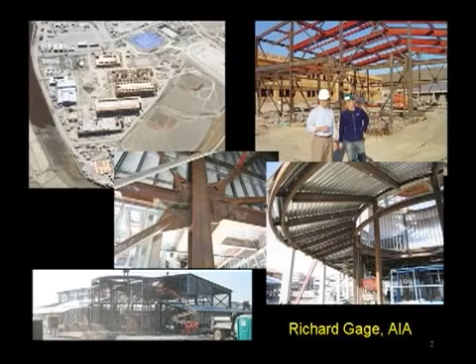Like many other architects, I've designed numerous fireproof steel frame buildings in my career, including $3 and $10 million gymnasiums, and the day-to-day construction administration services for this $120 million high school in San Ramon, California.

I'd like to start by thanking each and every one of you for being willing to consider the very difficult subject of the destruction of the World Trade Center and its staggering loss of life on 9/11. Just as architecture and engineering projects are sometimes joyful, sometimes quite difficult, this particular project has proven to be extremely difficult - not difficult in terms of reaching conclusions, but difficult in terms of the implications of those conclusions and finding people who are open-minded enough to be willing to hear the facts about these building collapses.

Check out every fact that we point out, because it's extremely important that we know the whole truth about this event. After all, it served as the pretext for the invasion of two countries in which already over 1 million people have perished, also as the pretext for the loss of many of our own cherished liberties here at home in the United States through recent legislation such as the Patriot Act, the Military Commissions Act, and the forthcoming Senate Bill 1959, the Violent Radicalization and Homegrown Terrorism Act, in which many of us can be named a terrorist and have no right to an attorney or a trial by jury.

Another 9/11 could happen again if we don't dedicate ourselves to finding out exactly what happened and why, and to bringing those actually responsible to justice.

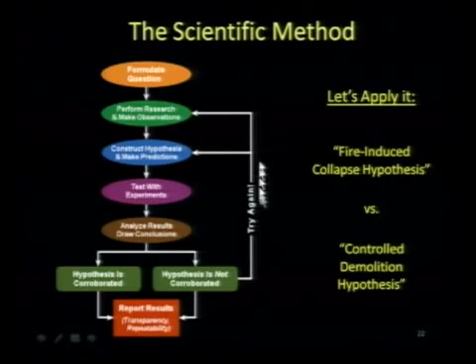If it is not found to be corroborated, we think and try again, and construct a new hypothesis with new observations, new research. Buildings are destroyed by a number of different forces, each of which have very different and identifiable characteristics. For instance, fires affect buildings quite differently than controlled demolitions.

Fires, by their nature, tend to creep from place to place, as they run out of fuel, moving to fresh new fuel sources, leaving the burned out area to cool. So when collapses do occur - and by the way, you'll note that they've never occurred in over 100 examples of very hot, very large, and very long-lasting fires -

buildings tend to fall over. They fall asymmetrically, burned out on one side organically, if you will. It's a natural process. They don't fall straight down through the path of greatest resistance.

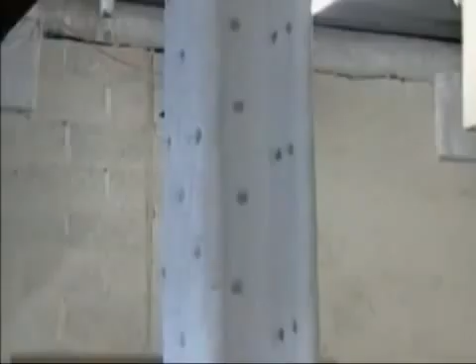Let's listen to Jonathan Barnett from FEMA talk about what fires are expected to do in steel buildings. The way in which steel-framed buildings behave in fires depends on their construction. In this test, done by British Steel in 1995, a large amount of typical office furniture was burned to see what would happen to the heavy steel beams that supported the ceiling.

When steel is bare, when it heats up, it gets weaker. It's not that it melts in a fire. In fact, normal fires are not hot enough to melt steel. Even if you were, for example, to use an unusual fuel like kerosene, you cannot achieve temperatures hot enough to melt steel. But what happens is it starts to lose its strength.

And as it loses its strength, it starts to sag. It becomes softer and sags and can no longer support the load. This was the largest test of its kind ever conducted. It showed how unprotected steel can be distorted, even by a normal office fire. But as is typical in steel buildings, the structural beams only slowly and progressively warped and sagged. There was no chance of a sudden collapse.

In over 20 years, I have not seen, until recently, a protected steel structure that has collapsed in a fire. So what was the cause of the devastating, explosive failure that happened to the World Trade Center?

These particular buildings collapsed. They follow the path of least resistance, or they fell over. You can see that the building structure holds the building together in some recognizable form. The structural elements have not been dismembered from each other, and their concrete is not pulverized to dust. They follow the path of least resistance, which is generally over.

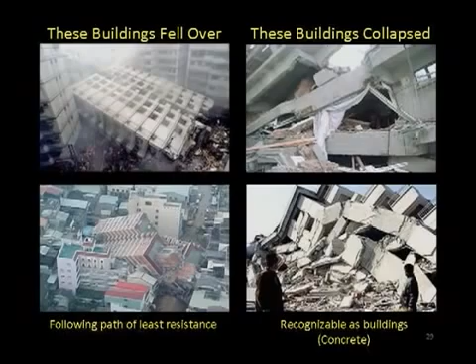These buildings exploded. Witnesses hear sounds of explosions. They see flashes of light. There's thick, billowing, enormous pyroclastic clouds of pulverized concrete. The expansion of the gases very quickly produces this cauliflower-like formation that we see in the smoke. This is a controlled demolition.

Let's focus on this type of destruction first. We have hundreds of examples from all across the country from which to make our comparison, because it's the most commonly used method to demolish high-rises. This is what a high-rise looks like when it's being demolished with explosives.

Controlled demolitions can be engineered in many different ways. Normally, the purpose of a controlled demolition is to remove a structure while avoiding damage to adjacent structures, and to do so economically. Typically, a tall building like this is demolished by placing thousands of cutter charges throughout the columns and beams in the building, then detonating them in a very precise order, starting with the interior structures and progressing outward, synchronistically timed floor by floor.

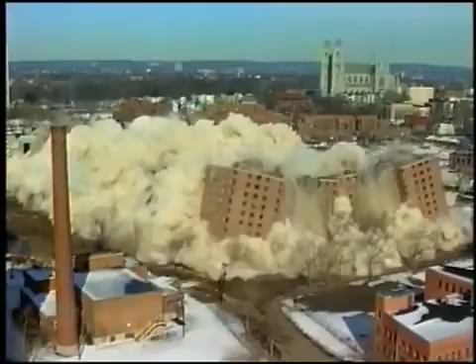Destroying the interior columns allows the unsupported weight to pull the exterior inward. Destroying the building from the ground up allows the weight of the building to be harnessed to do much of the destruction. So the result is an implosion, producing a vertical, symmetrical collapse at free fall speed into a consolidated rubble pile that's broken up and ready for loading and shipment. Now, this is a feat that only a handful of companies in the United States can accomplish.

Let's take a look at some of the key characteristics of controlled demolition. First, we have a sudden onset of destruction at the base of the structure. We have straight down symmetrical collapse into its own footprint, because demolition waves remove the column support, resulting in a free fall speed, virtually, through the path of what was the greatest resistance, thousands of tons of structural steel. We have a total dismemberment of the steel structure, so it's loaded and ready for shipment.

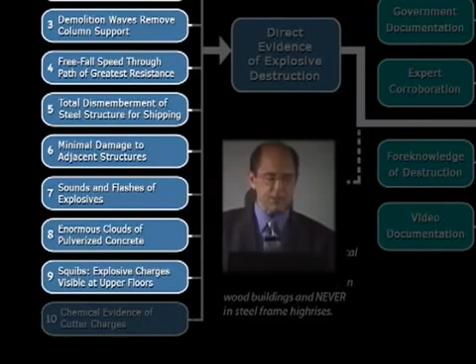We have minimal damage to adjacent structures, sounds and flashes of explosions heard and seen by witnesses, enormous clouds of pulverized concrete, squibs sometimes, explosive charges that go off at the wrong times, chemical evidence of cutter charges. These are all fairly typical, and they go to show us direct evidence of explosive destruction.

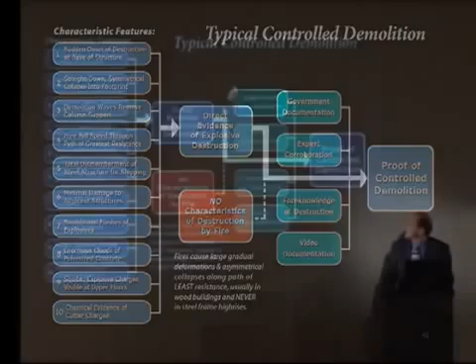Now, the interesting thing is that not one of these typical characteristics of controlled demolition can be explained or accounted for by fire, let alone all 10 of them. Typically, we'll have government documentation, expert corroboration, foreknowledge, and video documentation, all of which supports the hypothesis of controlled demolition, providing proof beyond a reasonable doubt.

Let's take a look at World Trade Center 7 now. It was 47 stories tall, what would have been the tallest building in 33 of our states, half the height of the Twin Towers, dwarfed only by its proximity to what was, for a couple of years, the tallest buildings in the world. It was not hit by an airplane.

It was the third World Trade Center high-rise to collapse on 9/11, at about 5:20 in the afternoon. World Trade Center 7 was hit by debris from the North Tower. You can see it being pelted here. And it sustained about 8 fires, according to NIST, on various floors.

This is World Trade Center 7, 47 stories high. Don't be confused by the shadow from this building. Here we have the 12th and 13th floor fires and the 7th floor fire on the north side of the building, the opposite side of the building that was being pelted by the North Tower.

Curiously enough, the Securities and Exchange Commission was operating out of this floor, which lost thousands of files related to hundreds of cases it was actively pursuing against Wall Street companies like Enron and WorldCom. So we are looking for an investigation that goes well beyond the buildings, of course.

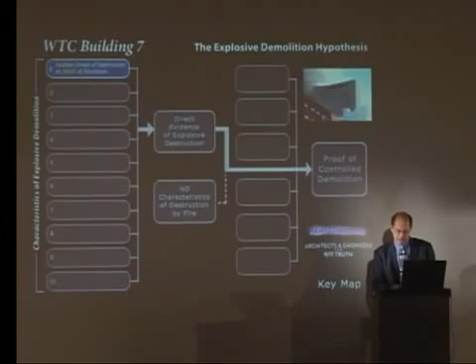Now let's take a look at the evidence of World Trade Center 7 and see how it stacks up against the typical features of a controlled demolition, starting with, is there a sudden onset of destruction? Let's listen to this emergency worker.

We were watching the building actually because it was on fire. The bottom floors of the building were on fire, and we heard this sound that sounded like a clap of thunder. Turned around, we were shocked to see that the building was, it looked like there was a shock wave ripping through the building, and the windows all busted out, and it was horrifying.

And then, about a second later, the bottom floor caves out, and the building followed after that, and we saw the building crash down all the way to the ground. A sound of a clap of thunder, a shock wave ripping through the building, and windows busting out, and then the building coming down. Do we have a straight-down symmetrical collapse into the building's footprint?

Let's listen to Dan Rather narrate this collapse for us as we take our first look at the collapse of Building 7. What you're seeing are high shots. Now, here we're going to show you a videotape of the collapse itself. Now we go to videotape of the collapse of this building.

It's amazing. Amazing, incredible, pick your word. For the third time today, it's reminiscent of those pictures we've all seen too much on television before, when a building was deliberately destroyed by well-placed dynamite to knock it down. What, Dan? Deliberately destroyed by well-placed dynamite to knock it down?

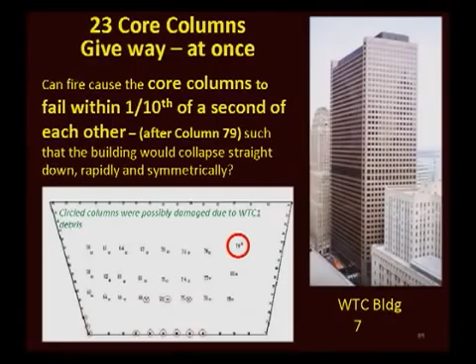Well, here's a floor plan of Building 7. Now, to bring a building smoothly, symmetrically into its own footprint without falling over, what we have to do is remove the core columns, because what we want to do is bring the outside of the building in on itself. Now, this involves a high degree of precision that fire is not capable of, being an organic process.

We're told by NIST that there is virtually no influence in the collapse from the debris from the North Tower or the damage caused by it, or from the diesel that may have been spilling out of the diesel line. Why? Well, the east penthouse is the first part of the building to collapse, a few seconds before the global collapse. NIST is now targeting column number 79. That is where they say the collapse initiated.

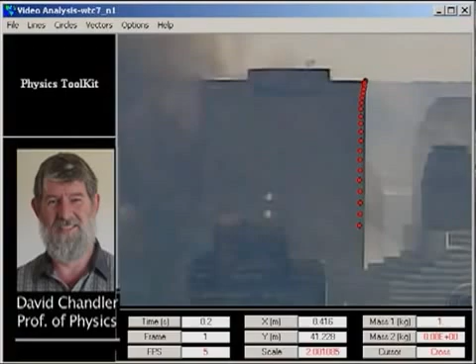Do we have a free fall speed of collapse through the path of greatest resistance? Let's listen to David Chandler. We can measure the acceleration of Building 7 by video analysis. I used a magnifying glass to place markers at the corner of the building on each frame. From this, the software constructs a data table and various graphs. The slope of the velocity graph gives the acceleration.

Note that global collapse starts suddenly, and for the next 2.5 seconds the building accelerates at the rate of 9.88 meters per second squared. The acceleration of gravity in New York City is 9.802 meters per second squared. The difference is not significant. In other words, the rate of collapse of World Trade Center Building 7 over the first 2.5 seconds is literally indistinguishable from free fall in a vacuum.

What are we talking about? You can see second by second the building gaining downward momentum. You can plot the drop distance on a graph of time and it fits the free fall curve almost perfectly. What does this mean? That the columns had to have been removed, and removed virtually simultaneously on each floor, synchronistically timed, so the building had no resistance virtually on the way down.

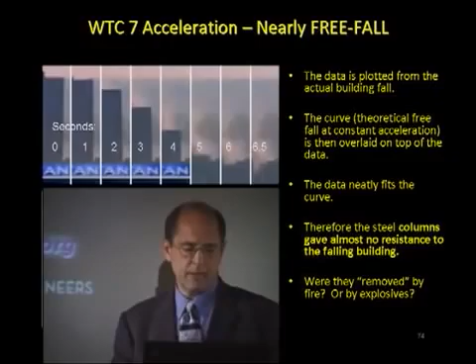Do we have a total dismemberment of the steel structure? We had a 47-story skyscraper compressed to 4 stories. How does this happen? This building had some moment-resisting frames on several floors, that's where the beams are welded very rigidly to the columns.

Do we have sounds of explosions, though? Here's Craig Bartmer from the New York Police Department. The whole time you hear him: thum, thum, thum, thum, thum. I think I know an explosion when I hear it. I was real close to Building 7 when it fell down, but that didn't sound like just a building falling down to me while I was running away from it.

There's a lot of eyewitness testimony down there hearing explosions. I didn't see any reason for that building to fall down the way it did, and a lot of guys should be saying the same thing. How about Kevin McPadden? He came back over with his hand over the radio, and it sounded like a countdown. At the last few seconds, he took his hand off, and you heard 3, 2, 1, and he was just saying, 'Just run for your life, just run for your life.' And then it was like another 2, 3 seconds, you heard explosions, like boom. It's like a distinct sound.

It's not like when in compression, boom, boom, boom, boom, like floors that were dropping and collapsing. This was boom, and you felt a rumble in the ground, like you wanted to grab onto something. That, to me, I knew that was an explosion. There was no doubt in my mind.

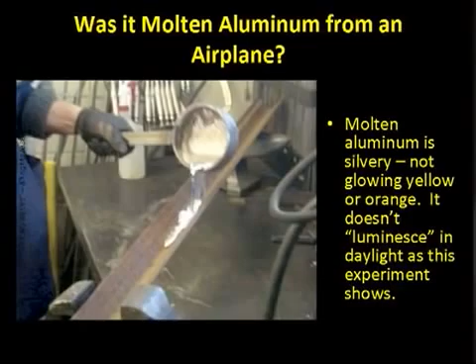As of 21 days after the attack, the fires were still burning and molten steel was still running, says World Trade Center structural engineer Leslie Robertson to a conference of structural engineers on October 5th, 2001, one month after 9/11. Debris past the columns was red hot, molten, running. Fires burned, molten metal flowed in the pile of ruins, still settling beneath my feet.

Well, what do the first responders and the demolition contractors say about molten metal? Saw pools of literally molten steel. Molten metal beams had just been totally melted. It was dripping from the molten steel. Steel flowed in molten streams. They're finding molten steel, seeing the molten steel, uncovering red-hot metal beams. Molten metal, red-hot, weeks after the event. Molten steel at the heart of the tower's remains. Molten steel beams, streams of molten metal that leaked from the hot cores and flowed down the broken walls. Molten metal dripping from a beam. The end of the beam would be dripping with molten steel.

Structural engineer Abolhassan Astaneh-Asl from Berkeley cites and documents, 'I saw melting of girders in the World Trade Center, still so hot that molten metal dripped down the side of the wall from Building 6.' A fire truck 10 feet below the ground was still burning two weeks after the tower collapsed. Its metal so hot that it looked like a vat of molten steel. Pieces of steel, still cherry red.

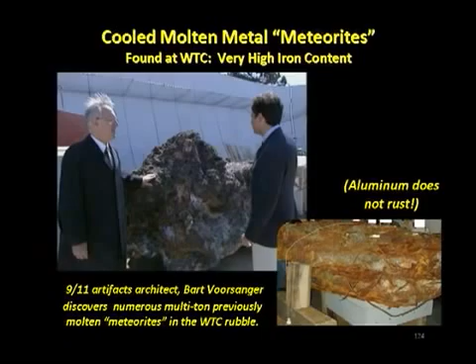One of the more unusual artifacts to emerge from the rubble is this rock-like object that has come to be known as the meteorite. It's this fused element of steel, molten steel and concrete, all fused by the heat. Architects, engineers, people who work with steel, welders have just never seen the level of destruction and deformation of this material in our lives. These cooled meteorites are not aluminum because aluminum doesn't rust. So it's not a melted airplane.

Mark Loizeaux, the president of Controlled Demolition Incorporated, told the American Free Press that in the basements of the World Trade Center, where 47 central support columns connected to the bedrock, hot spots of literally molten steel were discovered more than a month after September 11th. These incredibly hot areas were found at the bottoms of the elevator shafts, down seven basement levels. The molten steel was found three, four, and five weeks later when the rubble was being removed. He said that molten steel was also found at World Trade Center 7. The highest temperature was in the east corner of the South Tower, where a temperature of 1,377 degrees Fahrenheit was recorded. The molten steel in the basement was more than double that temperature.

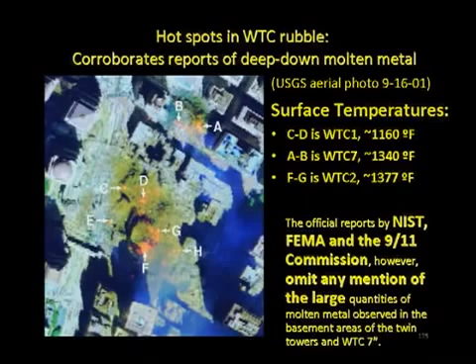What are we talking about here? Here is Building 7 at A and B, and here is the North Tower and the South Tower. These hot spots are 1,340 to 1,370 degrees—the temperatures of the hottest office fires. But there was no fire on the surface of Ground Zero after the collapses. What are we measuring here? We're measuring the molten metal that was seen by these first responders four, five, six stories down below in the basements, surely at least two or three times these temperatures.

What's the problem with that? Office fires, Eagar says, reach 1,200 degrees. NIST claims 1,800 degrees, for which we have no evidence for office fires of that temperature in the Trade Center towers. Structural steel doesn't even begin to melt until 2,700 or so degrees. We're missing 1,000 to 2,000 degrees of temperature, heat energy required to produce this stuff. Where is it coming from? We'll be taking a look at a possible suspect, thermite, which reaches temperatures of 4,500 degrees. Molten metal flowing off the substance held in the jaws of this backhoe.

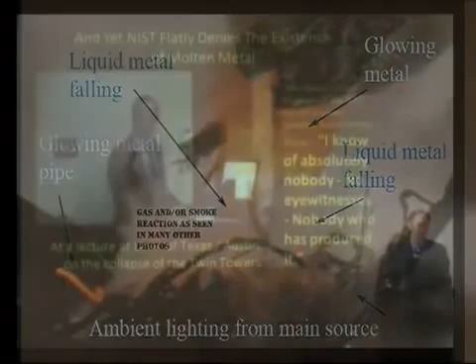Let's listen to John Gross, lead engineer of NIST, tell us about the molten metal from his perspective.

I'm curious about the pool of molten steel found in the bottom of the towers. Have you seen it? Not personally, but eyewitnesses there found huge pools of molten steel beneath the towers, and some scientists don't think the collapse of the building could have melted all that steel. A physics professor, Stephen Jones, analyzed some of the steel and found evidence of thermate residue, which would explain how the buildings collapsed by means of pre-planted explosives. So have you analyzed the steel for any of those residues?

First of all, let's go back to your basic premise that there was a pool of molten steel. I know of absolutely nobody, and no eyewitness who said so, nobody who's produced it.

You'd get down below and you'd see molten steel running down the channel rails, like you're in a foundry. Yeah, like lava, like it was lava from a volcano. No eyewitness who said so.

There are actually melted beams where molten steel was being dug out. No eyewitness who said so.

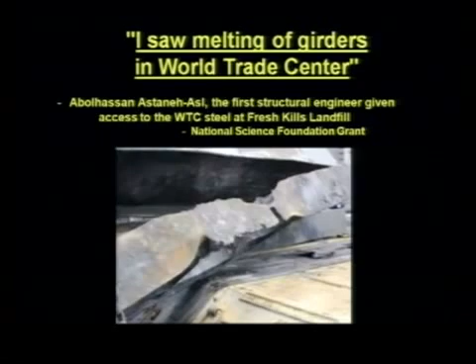And this structural engineer documents, I saw melting of girders in the World Trade Center. Nobody who's produced it. This fused element of steel, molten steel. I know of absolutely nobody, and no eyewitness who said so, nobody who's produced it.

What is the problem here? Somebody's lying. I'm going to leave it up to you to make your own conclusions. The last fire was not even extinguished for 3 months after 9/11. Tom Manley says you couldn't even begin to imagine how much water was pumped in there, it was like creating a giant lake.

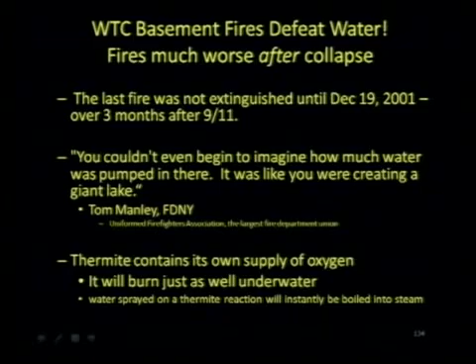Well, thermite contains its own source of oxygen. It burns just as well underwater. How about chemical evidence, though? What produced all this molten metal? And what is thermite anyway?

Thermite, an incendiary used by the military, is a compound of iron oxide and aluminum, which when ignited sustains an extreme heat reaction, creating molten iron. In just 2 seconds, thermite can reach temperatures over 4,500 degrees Fahrenheit, quite enough to liquefy steel. We know open-air fires cannot burn hot enough to melt steel, but metal had melted at the base of the towers.

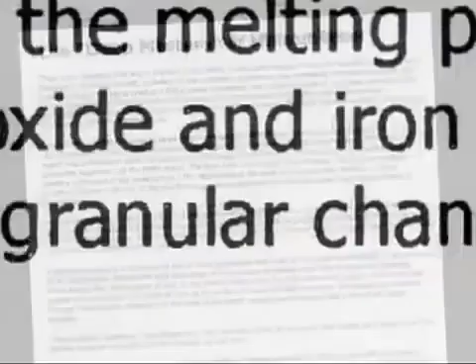Appendix C of the FEMA report describes sulfur residues on the World Trade Center steel. The New York Times called this the deepest mystery of all. Sulfur slightly lowers the melting point of iron, and iron oxide and iron sulfide had formed on the surface of the structural steel. Sulfur used with thermite is called thermate, producing even faster results.

NFPA 921 is the guide for fire and explosion investigations. Was it used? They say unusual residues could arise from thermite, magnesium, or other pyrotechnic materials. In a crime scene, which this was an example of, did NIST use the guide? No. They acknowledged they didn't even look for such evidence.

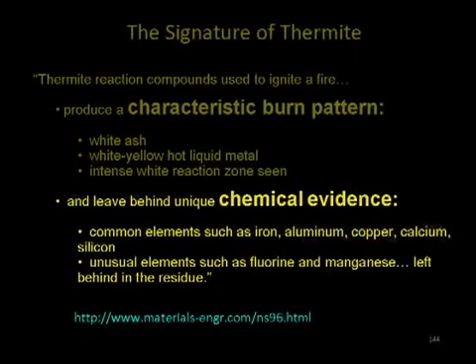But others did. Dr. Stephen Jones performed chemical analysis on the previously molten metal. He did background research, again part of the scientific method. Thermite would create a characteristic burn pattern with a white ash, a white-yellow hot liquid metal, and intense white reaction zones. It would also leave behind chemical evidence: common elements such as iron, aluminum, copper, calcium, silicon, and unusual elements such as fluorine and manganese left behind in the residue.

He sent a sample from this 40-pound chunk of previously molten metal, one of those meteorites. He finds it's predominantly iron, so we can rule out aluminum from the jet plane. It has small amounts of aluminum, sulfur, and potassium, and manganese and fluorine in abundance. Manganese is from potassium permanganate, commonly used as an oxidizer in thermite. Fluorine is also used in sol-gel type thermite charges. So these appear to be the thermite fingerprint.

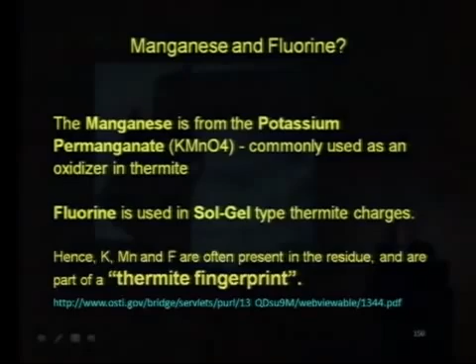Let's take a look at what else Dr. Jones found in the slag from the end of this memorial at Clarkson University. He performs X-ray fluorescence on this small piece of slag and finds, once again, iron, sulfur, potassium, manganese, calcium. Sol-gel explosives are a super thermite, tiny aluminum particles in iron oxide in this sol-gel.

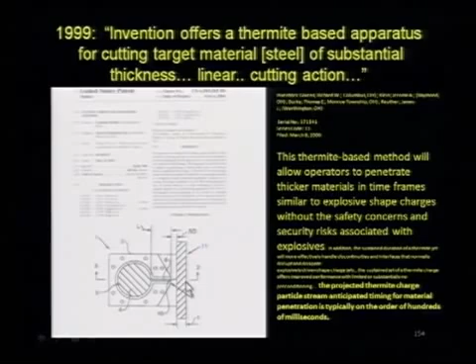They can be cast into shape, like a clay. Lawrence Livermore Lab did research on this, and this invention offers a thermite-based apparatus for cutting target materials. You pack the thermite in here, ignite it, and it's forced through, melting the structural steel element in fractions of a second, almost as effective as high-energy explosives like RDX and C4.

Which are more common in classic controlled demolitions. If sol gels were used, they would leave behind a very unique signature: 1,3-diphenyl propane. In fact, the EPA finds one molecule in their toxicological studies at levels that dwarfed all others, 1,3-diphenyl propane. Erik Swartz says they've never observed it in any other sampling they've ever done.

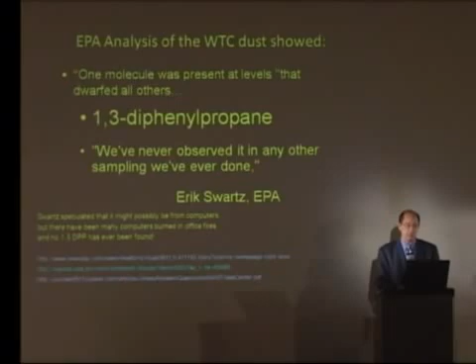But is there evidence of thermite in the World Trade Center dust? Dr. Jones received no less than four separate samples of World Trade Center dust, some of it from Janette MacKinlay's apartment across the street, where the windows blew in and filled her apartment with dust. Another sample was found about 10 minutes later on the Brooklyn Bridge.

He takes this and puts a magnet over it, and finds small particles that come up to the magnet. Some of them are angular, some are round. They look like this. In fact, he calculates by the weight of the amount of these spheres found in the dust that there must have been about 10 tons across all the available dust. They're about a 1/16 of an inch in diameter at the largest, and most are smaller than a human hair. What could produce such an incredible array of microspheres?

If you had thousands of cutter charges going off in the columns and beams throughout the building, under this incredible pressure, you'd see something like this—tens of thousands or millions of tiny droplets. What's the shape of those droplets? When a liquid is dispersed like this, its surface tension forms it into almost a perfect sphere. In the case of molten iron, those droplets cool and fall along with the dust everywhere.

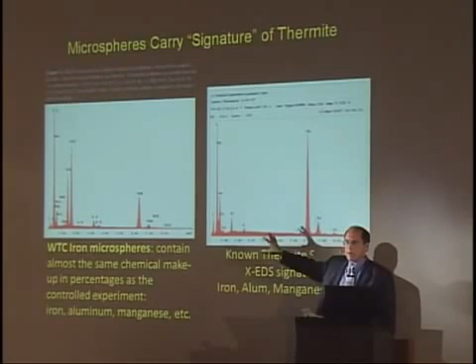He compares the spheres to a known thermite experiment performed by John Peroulis in Nevada, which finds the same spheres. In fact, another XEDS is done, and we find in the microspheres the same kinds of evidence—iron, manganese—and in the case of this known thermite signature, it matches basically. In other words, we have a controlled experiment to compare the results against. For those who know how to read these graphs, such as Dr. Jones and others, this is pretty much a direct match indicating this is the signature of thermite.

Dr. Jones is not the only one who finds these iron-rich microspheres. The EPA finds them in all the dust in the toxicological studies they're doing. They have no idea where they came from. They sweep it under the rug. It has only one possible formation: from liquid molten iron under extreme pressure. R.J. Lee finds the iron-rich microspheres on top of the Deutsche Bank building in their toxicological studies.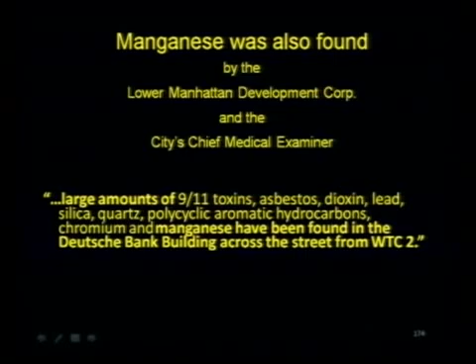Dr. Jones concludes that given the mix of trace metals present in high concentrations in the dust, such as zinc, copper, manganese, and the formation of iron-rich aluminum spheres, it's clear that significant aluminothermic reactions occurred. He can reverse engineer this and suggest there must have been in the thermite mix powders of aluminum, iron oxide, copper oxide, zinc nitrate, and potassium permanganate.

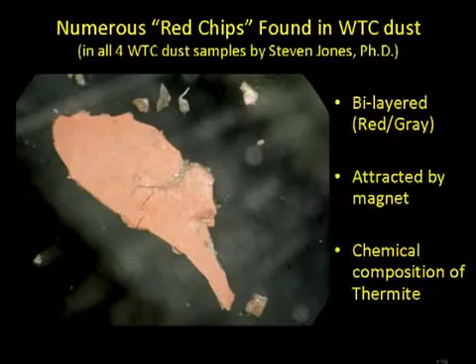Would there possibly be any unignited thermite pieces in the World Trade Center dust? Indeed, he finds it—it also comes up to the magnet from his dust samples. Many chips, one about a 1/16 of an inch long, red on one side, gray on the other. The red side is composed of tiny iron oxide particles and aluminum. He does an XEDS on this too, finding a little sulfur, more aluminum, lots of iron, and manganese.

Compared to traditional thermite, it's also a match for unignited thermite. This stuff is not made in a cave in Afghanistan—the Lawrence Livermore lab came out with papers about this. The particles being so small allow for almost instantaneous ignition between the two chemicals, aluminum and iron oxide, producing very explosive results. Los Alamos lab and Lawrence Livermore lab have produced these results.

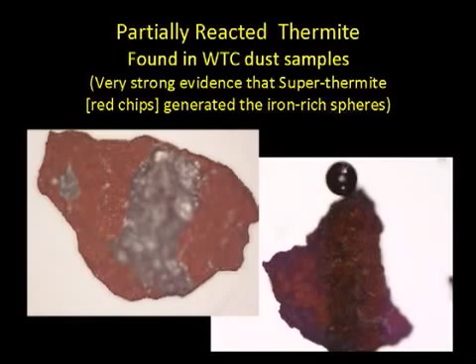He continues his study and finds additional chips that are partially ignited, with spheres embedded in them, indicating that the source of the spheres is, for all intents and purposes, identified very clearly. With Dr. Jones and his small team of scientists, through EDS, XRF, and WDS, they identify the components of these spheres and chips: predominantly iron, along with aluminum, oxygen, and silicon.

The results, coupled with the visual evidence at the scene, such as the flowing hot liquid metal, provide compelling evidence that thermite reaction compounds were deliberately placed in both World Trade Center towers and Building 7. These results are documented in a peer-reviewed journal.

Verify the results, please. This must be repeatable. There's lots of dust out there. We encourage everyone who has any samples of this dust to email us at ae911truth.org so that we can get repeatable samplings done. We need a lot of this.

Now, all of this is direct evidence of explosive destruction in Building 7. We'll jump back to only Building 7 now. None of these characteristics can be explained by fire, let alone all of them.

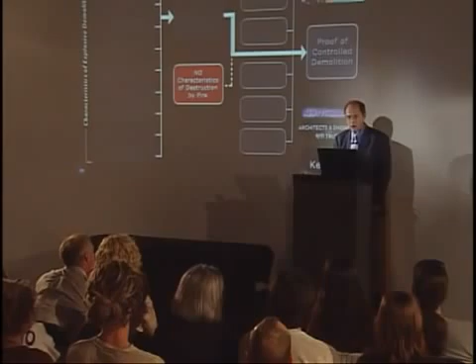Why? Well, buildings are protected from fire. High-rise steel frame buildings in particular have 2- and 3-hour fire protection designed to allow the occupants to escape a fire. But even in fires that are much longer than 2 hours, larger, these buildings have not collapsed. Why? Let's take a look.

Here's New York, 1970, burned 6 hours over 5 floors. Los Angeles, 3.5 hours over 5 floors. Philadelphia, 18 hours over 8 floors. Caracas, Venezuela, burned 17 hours over 26 floors. Not one of these fires brought these high-rises down.

In fact, no steel frame high-rise building has ever been brought down by any fire. Yet relatively small and randomly placed fires and a whole lot of smoke is said to have brought this skyscraper, Building 7, down in 6.5 seconds after burning just that afternoon.

How about that FEMA report and these investigations? Well, we had 4 investigations starting in 2001 with the ASCE, American Society of Civil Engineers. We're told these are volunteers, but these are not your average PTA volunteers. These guys earn $10 million annually, on average, between them, working for the Defense Department, with their expertise mainly on blast resistance of buildings. Then we have the FEMA report in 2002, which finally got some funding, $600,000.

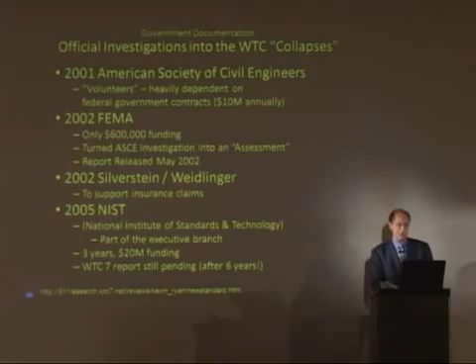Then we have the NIST investigation, which took over all of these investigations in 2005 and came up with a 3-year, $20 million effort. We'll take a close look at NIST's work. These experts who worked on these buildings all worked from the FEMA report, or most of them, into the Weidlinger report and into the NIST report. These are not independent investigations by any means whatsoever.

Let's listen to what FEMA did conclude, because it is interesting: evidence of a severe high-temperature corrosion attack on the steel, including rapid oxidation, sulfidation, and subsequent intergranular melting. Very interesting. Remember, office fires don't melt steel. What melted this steel? Sulfur formed during this hot corrosion attack on the steel.

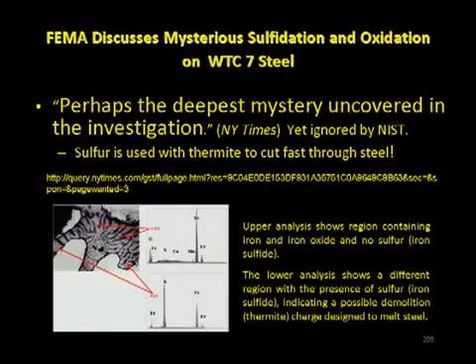Here is the intergranular melting documented for all of us, capable of turning a solid steel girder into Swiss cheese, like this former wide flange column from the structural steel in Building 7. Now they document this very carefully in their Appendix C.

Listen to this. Gaping holes, some larger than a silver dollar, let light shine through. A 1-inch column being reduced to half thickness, its edges curled like a paper scroll, having been thinned to almost razor sharpness. This was the flange, curled up on itself. This is the web of that wide flange column.

NIST swept this entire Appendix C under the rug, and we do not have it in the official report today. Listen to this, though. The collapse of World Trade Center 7 had a small debris field as the facade was pulled downward, suggesting internal failure and implosion. The specifics of the fires in World Trade Center 7 and how they caused the building to collapse remain unknown at this time. What? Unknown?

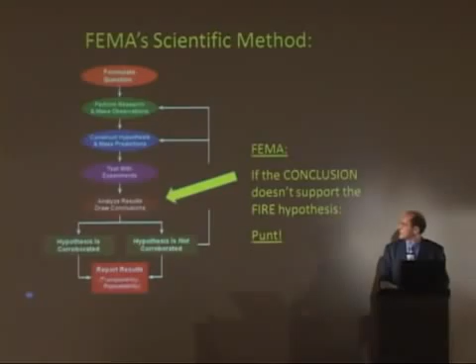The best hypothesis, fire plus random damage, and then complete collapse, has only a low probability of occurrence. Wait a minute. You spent $600,000 of our taxpayer money and over a year investigating this, and your best hypothesis isn't even right? What do you do when your hypothesis is not corroborated by the facts? You go back and construct a new hypothesis. In FEMA's case, punt. And that's what they did. They say further research, investigation, and analysis are needed to resolve this issue.

But unfortunately, for those hoping to resolve the issue, much of that evidence had already been destroyed, about 99% of it, in fact, by FEMA, before the report came out in May of 2002.

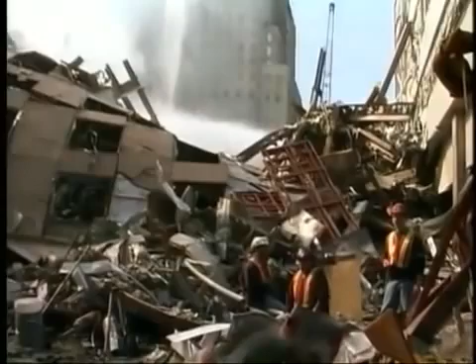Let's listen to what real investigation should have been performed. Normally, when you have a structural failure, you carefully go through the debris field, looking at each item, photographing every beam as it collapsed and every column where it is in the ground, and you pick them up very carefully and you look at each element. We were unable to do that in the case of Tower 7.

Why? Because all the steel was removed before the report came out. In fact, 800 truckloads a day. Easily the three worst structural failures in modern history. Only 250 pieces were saved. Crucial evidence that could answer the questions is on the slow boat to China, exclaims Bill Manning, editor-in-chief of the 125-year-old Fire Engineering magazine that brings together fire protection engineers to communicate with each other, showing an astounding ignorance of the government officials to the value of a thorough scientific investigation. The destruction and removal of evidence must stop immediately.

Commission a fully resourced blue ribbon panel to conduct a clean and thorough investigation is what they were calling for. If the evidence contradicts your fire hypothesis, destroy it. That's where our tax dollars are going.

How about the 9/11 Commission, which was tasked with giving us the fullest explanation? No. Not one sentence in the 571 pages of the 9/11 Commission report even mentions the destruction of World Trade Center 7. Is this one of the reasons, perhaps, that Senator Max Cleland resigns from the commission, citing it's a national scandal? The investigation is compromised.

How about expert corroboration? How about Danny Jowenko, 27-year controlled demolitions expert? It starts from below. They've simply blown away the columns. It's controlled demolition. A team of experts did this. It's professional work, without a doubt.

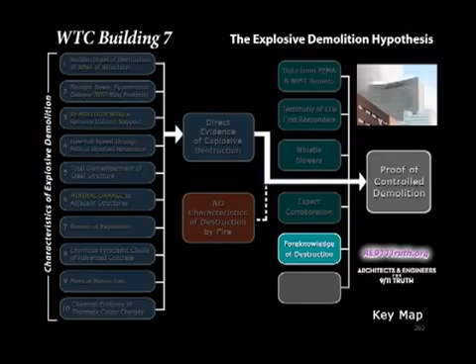Building 7, do we have any foreknowledge of its destruction? We're moving the command post over this way. That building's coming down, says Chief Nick Visconti. Well, there was some structural damage, as we've noted, and they were concerned about it.

By noon or 1 o'clock, they told us we had to move from the triage site up to Pace University, a little further away, because Building 7 was going to come down, or being brought down, says Indira Singh, interviewed by Bonnie Faulkner on KPFA. Did they actually use the words brought down? Yeah, that's what they said. We're going to have to bring it down.

This involves volition. Listen to these construction workers walking away from Building 7, and this police officer caught on CNN camera.

You hear that? Keep your eye on that building. It'll be coming down soon. Building is about to blow up. Move it back. All right, guys. We are walking back. There's a building about to blow up. On flame, debris coming down. Keep your eye on that building. It's about to come down. The building is about to blow up. Flame and debris coming down.

How do they know? And how about Kevin McPadden? What did he say? At the last few seconds, he took his hand off, and you heard 3, 2, 1. Countdown? Does that imply foreknowledge? Do fires bring buildings down to countdowns? Unlikely.

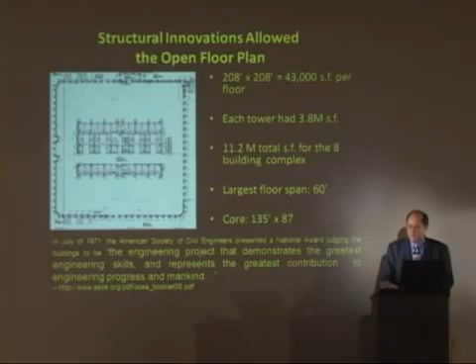Let's take a look at what we achieved. We have 60-foot spans, a perimeter structure which is like a tube structure, and this inner core. Let's take a look at it.

Most high-rises up to this time were built on a dense grid of steel or concrete frames all the way throughout the building, in a 20 or 30-foot grid. The Twin Towers were built as a tube structure with a very dense, strong mesh of steel surrounding the exterior, acting as a bearing wall which resists the lateral loads—earthquake, and in the case of this building particularly wind. Hurricanes up to 140 miles an hour it was designed to resist.

This perimeter structure was 14-inch columns, 3 foot 9 inches on center. Inside was this core, a dense grid of 47 immense box columns, 4 inches thick at the base, 2 inches thick at mid-height. Prefabricated floor assemblies with 22-gauge steel decking, over which was poured reinforced concrete, held up by 29-inch deep open-web steel trusses. These trusses were bolted to the perimeter columns and the core columns with 5/8-inch bolts, which we talked about regarding the different theories of what happened to them.

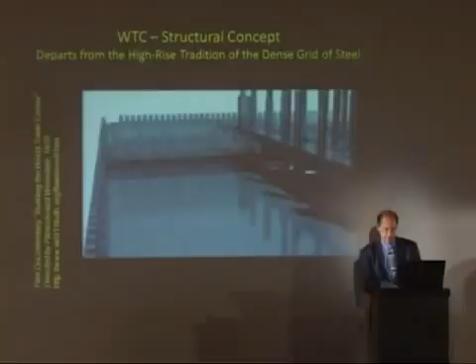Now, this is a structure within a structure. This dense core structure would have remained standing 1,300 feet in the air if this surrounding, less strong floor structure were to have collapsed around it. In fact, the perimeter structure probably would have been left standing for a while until its lack of support gave in. These are the core columns, 52 inches by 22 inches along the long edge, almost solid steel at the bottom.

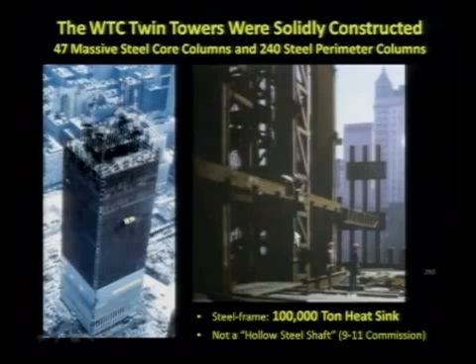Continuously welded from the bottom all the way to the top. Any 1,800-degree fire would have been conducted throughout this 100,000-ton heat sink. That's the reason there's been no collapse of steel frame high-rise fires, because of this steel.

Let's take a look at the structural imperative that was given to John Skilling. John Skilling and Les Robertson were the structural engineers who designed the streamlined steel frames of the Twin Towers in the 1960s. Because a wayward Army bomber flew into the Empire State Building in 1945, the towers were built with skyscraper crashes in mind. We had designed the project for the impact of our largest airplane of its time, the Boeing 707—that is, to take this jet airplane, run it into the building, destroy a lot of structure, and still have it stand up.

The building was designed to have a fully loaded 707 crash into it. That was the largest plane at the time.

I believe that the building probably could sustain multiple impacts of jetliners because this structure is like the mosquito netting on your screen door, this intense grid, and the jet plane is just a pencil puncturing that screen netting. It really does nothing to the screen netting. A very robust structure, in fact.

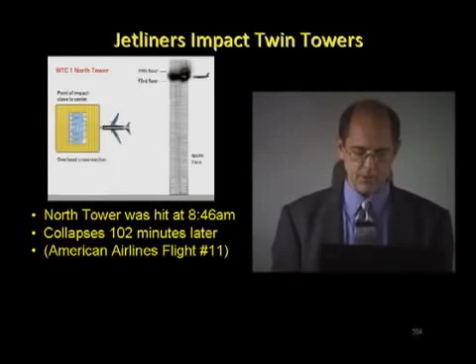Now, we have the North Tower being hit at 8:46 in the morning, and about 102 minutes later, after fires traveled around the floors and up the floors in the case of the North Tower, the building did collapse. The South Tower was hit about 15 minutes later, and after only about 56 minutes, it collapses, as the fires were in fact diminishing severely.

Skilling noted that he designed the towers to take a hit from a Boeing 707 traveling 600 miles an hour. When he was asked if he considered plane crashes, he cites, 'Our analysis indicated the biggest problem would be the fact that all the fuel would dump into the building, but the building structure would still be there.'

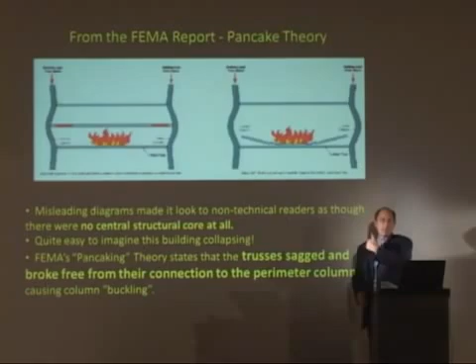This is FEMA's theory. We have the sagging of the trusses and the pulling away from the column, and then the subsequent pancaking down. Again, the trusses, one after the other, 6 foot 8 inches, every truss disengaging from the perimeter wall. NIST turns it around and blames the persistence of these connections pulling in the columns, causing the columns to buckle.

Now, it's generally more difficult for people to understand that the towers were a controlled demolition because it was so outside of our frame of reference. We'd never seen anything like this. So this, combined with the shock, kept us from being objective.

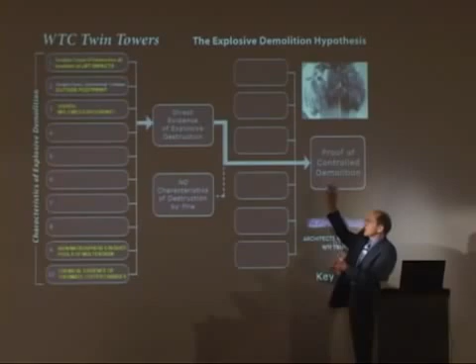But if you were to plan a fire-induced collapse as a result of airplanes, you'd start the explosions at the point of jet plane impacts. So in World Trade Center 2 and 1, we have all of the key characteristic features of controlled demolitions, but with some of these key differences. We have a beginning of detonation at the point of jet plane impacts, not at the base of the building.

In addition, we have not an implosion, but where everything is being exploded outside the footprint. We have squibs, or these explosions, that occur 20, 40, and even 60 stories down below. And as we already discussed the evidence for thermite in the molten metal and in the dust and the iron-rich microspheres. So let's take a look, starting with the sudden onset.

And what is the evidence for this, and how is it produced? Produced by the explosions. Now, the city's fire commissioner, Thomas von Essen, requires all of his EMTs and firefighters to record their experiences, about 500 of them, and in 12,000 pages, as it turns out, collected from 2001 to 2002.

The New York State Court of Appeals overturns the city's request to hold on to this information against the lawsuit by the New York Times. They failed, and why was the city holding on to this information? Was it because 118 of these firefighters witnessed sounds and flashes of explosions?

We felt the ground shake. You could see the tower sway, and then it just came down. All of a sudden, the ground just started shaking. It shook my bones. Shortly before the first tower came down, I remember feeling the ground shaking.

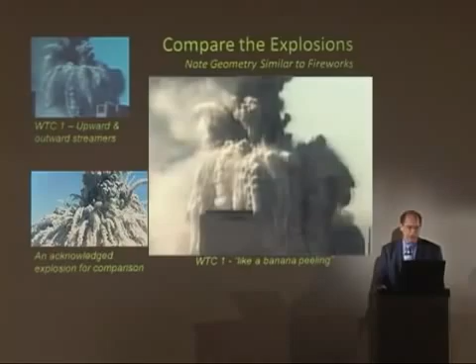Again, none of these explosions are a part of the official story. Now, compare these explosions to a known explosion on the left here.

Outward arching streamers, pyroclastic volumes of dust, symmetrical display like a mushroom. Does it look like a gravitational collapse to you?

How about an elevator modernization, which we know was going on the 9 months prior to 9/11? Yes, Elevator World, March 2001, documents it. In fact, they were in the middle of this modernization. Ace Elevator had the contract.

We're not conspiracy theorists, but it's pretty obvious that somebody needs to be asked some very key questions. There are people who noted that the elevators were locked in turn and that there were guards placed at these locked elevators during the modernization.

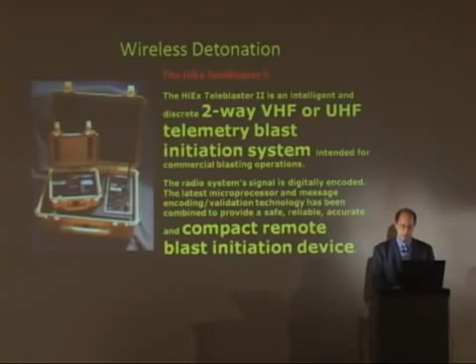Wireless detonation is common in the industry. You don't need miles of wire, and you can detonate them remotely with great flexibility, in fact.

Well, but is there a precedent? And this tells us that it couldn't have been a controlled demolition because it didn't start at the bottom, right? That's where most controlled demolitions start with buildings. Let's take a look and see if there's another way to do it.

The words of a senior blaster: we blow the basement, all the columns in the basement. Then we crack it up at the top to get it started. We go every other floor all the way down. Every explosive has a timer on it. That's why it's controlled. When the columns go, each floor goes down and impacts the one below and keeps going.

Mark Loizeaux is president of a company called Controlled Demolition. You don't have to go to the top floor. You can go almost anywhere in the structure, and given the right circumstances, you can release all of that stored energy, converting it into what is called kinetic energy. That's energy in motion, and that's what brings the building down.

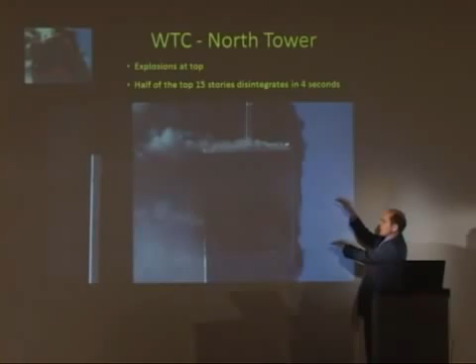What I want to point out to you is that you're going to see some explosions up at the top of the building, curiously enough. And what's going to happen is this entire section is going to telescope such that half of it, its upper half, is destroyed before there's any movement from the jet plane impact down. Let's take a look.

Here's the first evidence of explosion, and then over here, and then the collapsing. Of course, the violent clouds which are emerging even prior to the collapse. We're going to take a close-up look after this second look.

Let's take a look now closer up. Right away, we're seeing clouds forming up here. Well, wait, the collapse is supposed to be just down here. But we have asymmetrical damage to this building, right? The plane went in one side, and yet this complete 'symmetrical collapse,' we'll use in quotes from now on. Let's keep going.

Unexpected to many of us in terms of how swiftly it fell, just like the firemen saw, all the way around the building, they came down. The antenna falls first, before anything else falls, indicating core column damage first.

Now take a look at this from the same tower from the bottom, noting the violence underneath the mushroom cloud. The collapse is supposed to be occurring way up here, but down below, as you'll see in this second run...

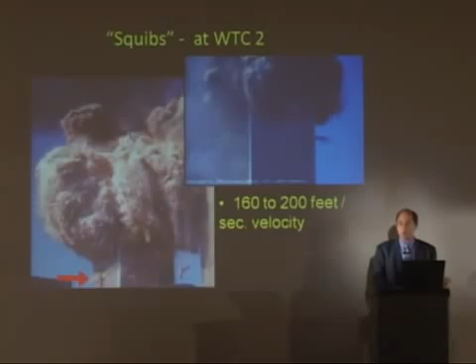Well, first of all, these are not puffs of air. They're pulverized building materials, and they occur at 160 to 200 feet per second, some of them. These velocities are propelled by explosives, 20, 40, and 60 stories below. How can the piston be producing all of that?

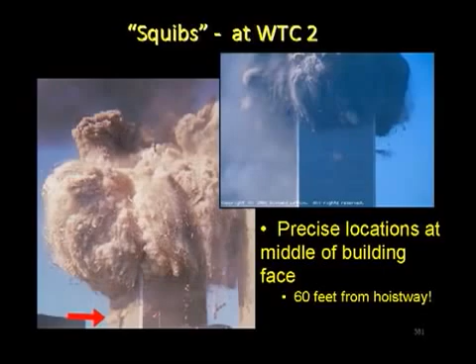In fact, there are these focalized ejections that occur halfway between the corners of the building. Also, if say this was the open office space, 60 feet long, the elevator hoistway is over here, the piston's going to shove the air into this room. It's going to fill the room fairly uniformly with air pressure before it breaks any windows, right? And then it might break several, but not these highly focalized, pinpoint accurate, geometrically precise, violent ejections. No, it's extremely unlikely. But let's look at a couple of them here.

As the South Tower begins to explode, we track two squibs near the bottom of the frame. They shoot out quickly at first, then slow and merge in with the rest of the dust cloud. Using the first few data points, we see the first squib shoots out at 44.98 meters per second, or about 100 miles per hour. Doing the same for the second squib, we get a speed of 56.3 meters per second, which works out closer to 126 miles per hour.

126 miles per hour of almost instant ejection velocity. Does fire create that? Do we have a near freefall pace through the path of greatest resistance? Let's take a look. Galileo's law of falling bodies calculates the time in which an object will travel a certain distance in complete freefall: distance d equals 16.08 times time in seconds squared. The South Tower was 1,362 feet tall. 1362 equals 16.08 times 84.7, or 9.2 seconds.

The Twin Towers came down at nearly free-fall speed. What are we talking about here? Let's try to put this in perspective with a story problem.

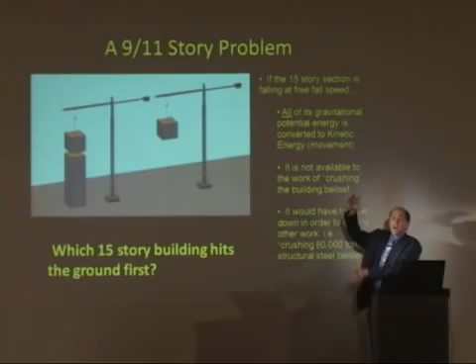We have a 15-story building held by this crane over 95 stories of nothing but air—no resistance, just air resistance. Next to it, another 15-story building held over a 95-story building with, say, 80,000 tons of structural steel in it.

Now we're going to pull the lever on these cranes and drop them both at once. I brought a 95-story building with me today, and we're going to test this theory of NIST's. I've got two 15-story buildings. We've got 80,000 tons of structural steel in this one, and we've got air resistance here.

So let's try it, okay? We'll put them both up here, and we'll even give a little bit of impact load too. Ready? 3, 2, 1. Oh my God! The one without any resistance under it hit the ground first, at virtually free fall speed.

This doesn't take much, does it? What happened over here? The building above met resistance. Through the energy of deformation, it came to a halt.

You'll find on our website, ae911truth.org, that Ken Kuttler and Gordon Ross produced papers showing and calculating that the building's downward momentum would have been almost immediately arrested. Where is the 15-story building that was driving this building down to the ground at free fall speed?

In the first 2 seconds, you saw it reduce half of its mass. It was blown outside—it couldn't have been used to influence the downward progression of the building. In the next 2 seconds, after 4 seconds total, it's destroyed itself.

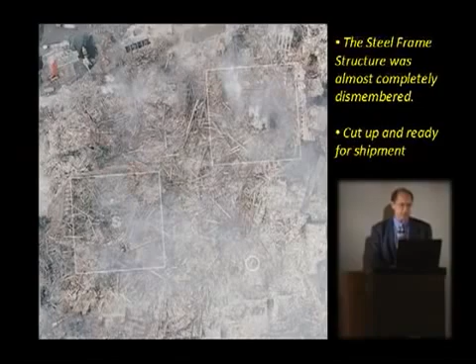The steel frame structure was completely dismembered. There are no large chunks of building, only those shards we saw of the perimeter structure. Does it look like a gravitational collapse to you? Do we have a lateral ejection of structural steel?

Let's take a look. Now let's look at the collapse of the Twin Towers. We are seeing explosions rather than implosions—a first in demolition history. A sequenced rumble becomes a roar as debris is thrown outward. The damage is not contained—windows are blown from neighborhood buildings.

What kind of energy enabled this? Would fire hurl metal and concrete sideways into the air? Here, a chunk of steel was flung 400 feet, wedging itself deep into 3 World Financial Center on Vesey Street. A FEMA photographer taking pictures of Ground Zero wondered why so many steel beams were jutting from neighborhood buildings.

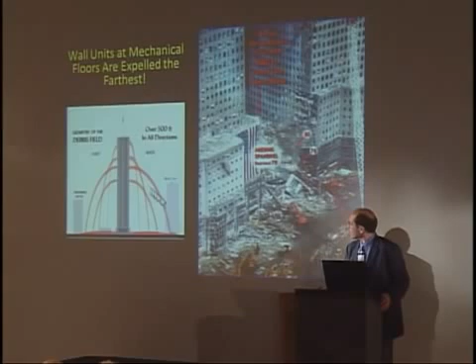What shot pieces of the towers all the way across the street? In fact, the portions of the tower with the greatest structural members—the sky lobbies and mechanical floors—had their perimeter units thrown farther than the perimeter wall units from the upper floors, which theoretically should have gone farther since they're higher, right? No—these perimeter units landed on the Winter Garden, 600 feet away.

Let's take a look at the physics of this. Girders weighing several tons were found 600 feet from the base of the North Tower. How fast they were ejected depends on where they originated. If they came from high in the building, they were thrown outward at about 50 miles per hour.

If they came from lower down, the speed had to be even greater. Gravity alone cannot account for such high lateral ejection speeds. Let's take a look at a couple of these specific ejections.

Using special software, we can analyze motion on video clips frame by frame. I have placed markers on each frame so we can track a particular projectile. From the markers, we can get a data table and plot various graphs. The data here shows that the object we were tracking was shot horizontally at over 70 miles per hour.

The energy needed to hurl a 4-ton girder at this speed is comparable to the energy needed to hurl a 200-pound cannonball 3 miles. What about those floors, those pancakes?

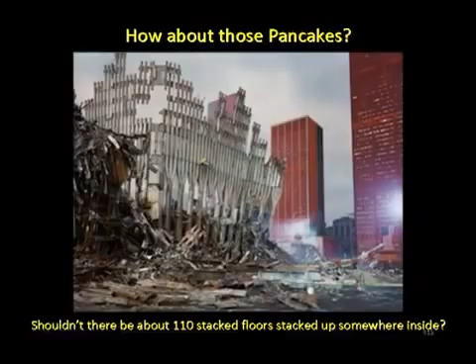This is a pancake collapse. We're looking for some pancakes down below. This is a 7-story lobby, with about 2 or 3 stories of stuff in there. We'll take a look at that stuff, but what I'm looking for is 110 floors with this kind of metal decking underneath, 4 and 5 inches thick of concrete, an acre in size, each of them. 110 acres of these. How many floors do we find down at the bottom?

Not 50, not 10, not even 1. We don't even find metal decking down there, or concrete. There's hardly any macroscopic chunks of concrete. What happened to the metal decking? What happened to the concrete?

Tom Patrizio brought these floor decks out, 6,000 of them, he says. I couldn't believe it, not one floor panel, he notes when he comes back to help the cleanup. Pancakes occur in pancake collapses.

Enormous pyroclastic clouds of pulverized concrete? Well, where is all the concrete, in fact? Let's listen to Jeff King.

One of the most significant things to my thinking that indicates that this could not have been the sort of collapse that we are told it was is the presence of the dust clouds. As you've seen in the pictures, and I'm sure all of us have seen probably more than we would like, there were very, very large clouds of very thick dust that enveloped the area, that crossed the river, that made it almost all the way to New Jersey from the pictures that I've seen. This type of flow is something that we are familiar with in physics. It occurs in only two situations that we know of naturally. One is in volcanic eruptions, where a large amount of material is suddenly exploded into the air and basically forms small particles. Thank you, Jeff.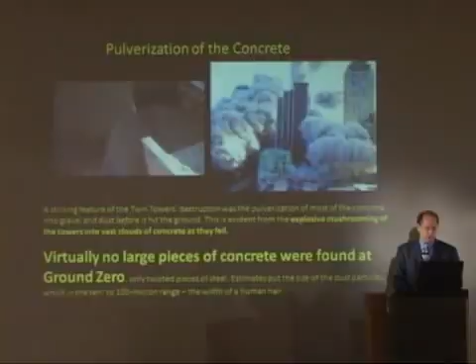And how about this firefighter? You have 2 110-story office buildings. You don't find a desk. You don't find a chair. You don't find a telephone, a computer. The biggest piece of a telephone I found was half of the keypad, and it was about this big.

The building collapsed to dust. And this dust made it almost across to New Jersey, across the river. Thick, billowing, laying a carpet of 4 to 6 inches thick around Lower Manhattan, pulverized to 100 micron to 10 mil particles, almost like talcum powder, some of it. It's very, very fine. Where's the grinder that produced this?

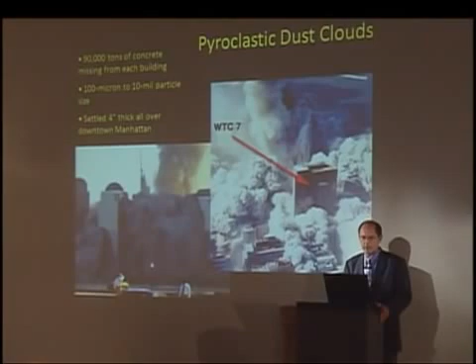90,000 tons of it, in these clouds that expanded 5 times the volume of the buildings themselves in just 30 seconds. Now, the available gravitational potential in the whole building is about 110,000 kilowatt hours. That's basically the weight of the building times its height above the ground, evened out. But the expansion of these clouds has been calculated to require about 10 times that energy in heat, which produces that expansion. So we have a problem here.

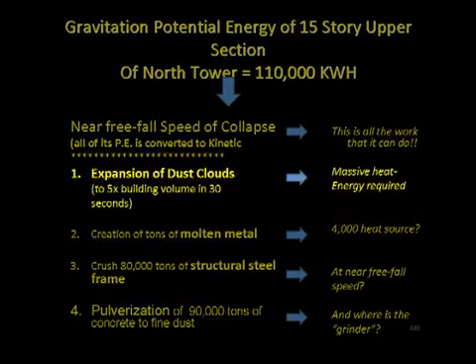In fact, the gravitational potential of the entire building needs to also produce 4 other heat sinks. But first, we have a 15-story building. This part of the gravitational potential alone, it's converted all of its gravitational potential into kinetic energy. They can't do any more work.

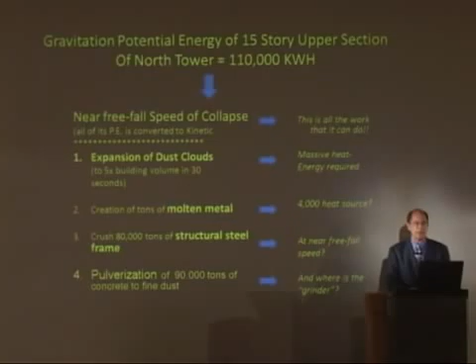In other words, it can't fall at free fall speed and then also crush 80,000 tons of structural steel. It can't fall at free fall speed and also grind up 90,000 tons of concrete. It can't fall at free fall speed and create by friction or anything else the several tons of molten metal seen by the first responders. The energy doesn't add up. We're talking overall about 50 times the gravitational potential energy of the building to produce all of this phenomena. How about the victims?

In April 2006, New Yorkers were distressed to learn that bone fragments, human remains from 9/11, had been found on the roof of the nearby Deutsche Bank building. How, in God's name, did those fragments get there? Bone fragments less than a centimeter long—how could they be so small? 700 bone fragments, a half an inch long, found on top of the skyscraper across the street.

Think about that one. There were 2,749 victims, but only 300 whole bodies were found. 20,000 pieces of bodies found, 6,000 small enough to fit into a test tube. 1,100 victims completely unaccounted for—in other words, no pieces large enough to gain any DNA from, vaporized. 200 pieces were matched to one single person.

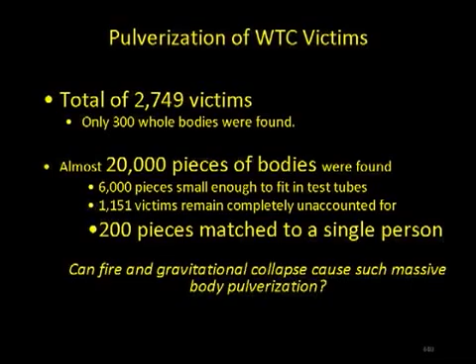Can fire and a gravitational collapse account for this massive pulverization of people? We talked about the iron microspheres, we talked about the chemical evidence of thermate in them and in the slag in the ends of the beams, and we talked about evidence of thermite and unexploded thermite in the dust itself. All of this is direct evidence of explosive destruction, and none of it can be accounted for by fire.

Let's have Dr. David Ray Griffin sum this one up for us.

These facts taken together render the likelihood of the official theory essentially zero. In fact, each of the 10 phenomena—the likelihood of it occurring without explosives being used is by itself essentially zero. But let's be generous and suggest maybe there's a 1% chance these things could occur: virtual free fall speed, straight down, enormous amount of dust—1% chance. But when you figure the probabilities, how many of them would occur, by the time you get up to 10 occurring without explosives, you're talking about a likelihood of 1 in a trillion.

So we can say that the official theory about the towers is disproved as thoroughly as any such theory could possibly be, whereas all the evidence can be explained by the alternative theory, according to which the towers were brought down by explosives. The official theory is therefore an outrageous theory, whereas the alternative theory is, from a scientific point of view, the only possible theory.

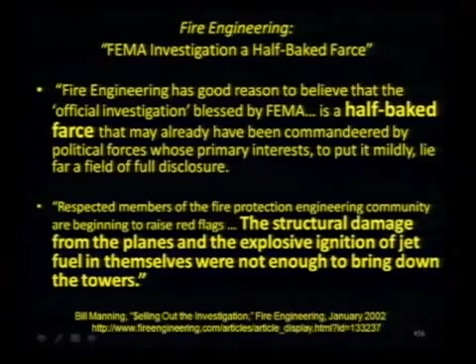How about that NIST report? We got $20 million in 3 years—what happened with our tax dollars? Their task was to determine how and why World Trade Center 1 and 2 collapsed, and how and why World Trade Center 7 collapsed. Let's look at their objective.

The focus of the investigation was on the sequence of events from the instant of aircraft impact to the initiation of collapse for each tower. For brevity in this report, this sequence is referred to as the probable collapse sequence. It doesn't actually include the structural behavior of the tower after the conditions for collapse initiation were reached, and collapse became, they say, inevitable.

Wait a minute. You're going to spend 3 years and $20 million, model every turbine in the airplane, and then stop the entire investigation before the real action begins—right at the point where the truss was sagging and pulling in the first column—and just stop your analysis? How many engineers did you have working on this, and what are you concluding?

They have 10,000 pages in this report. This is the half page that explains everything after that—no analysis. Let's see their conclusion: the structure below the level of collapse initiation offered minimal resistance to the falling building mass at and above the impact zone. Structural engineers do this every day; this is not rocket science.

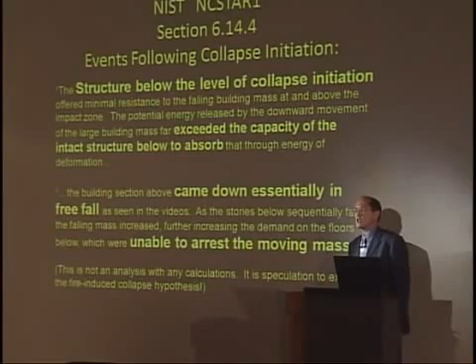You have the known weight of this building mass, you have the known columns below it to resist it, you let it go in your models and calculate what the resistance is. Why didn't they do it? Could it be because they knew darn well that it would not have collapsed at all?

Wait, what was the report title? Final Report on the Collapse of the World Trade Center Twin Towers. Probably should have called it Final Report on the Initiation of Collapse.

They also cast doubt on their own theory. They say to us in a letter to our request for correction, which several of us applied for and have yet to see adequate results from: we are unable to provide a full explanation of the total collapse of the Twin Towers.

Thank you. We think so too.

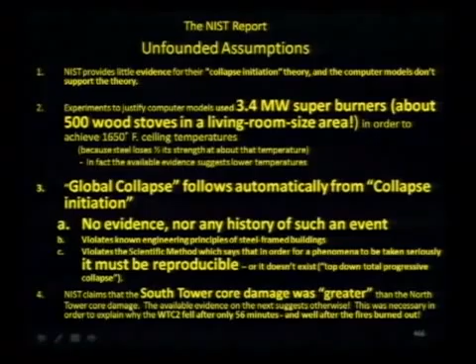He documents the startling omissions and outrageous lies, which you'll have to go into yourself when you have a little more time, and the fudged computer simulations.

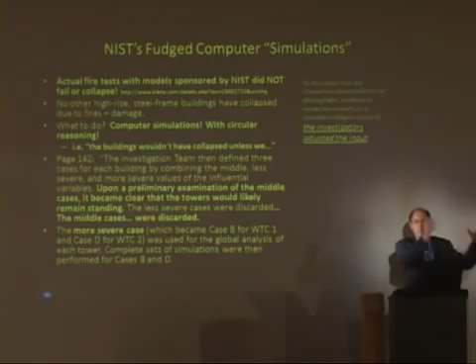They document unrealistic scenarios C and D, and realistic scenarios A and B. A and B didn't make the building collapse, so they crank up the airplane speed, reduce the strength of the structure, increase the fuel—they make all these adjustments until they get to the more unrealistic scenarios, which they're actually fairly open about, to get the computer model to collapse.

Structural engineers rail against NIST because they refuse to show the visualization. It's a black box—you cannot download any of this data. This was a public building, or at least until 3 months prior to 9/11 it was a public building, and it should be a public investigation.

Clearly it was a public event, prompting their former chief of their fire science division, Dr. Quintiere, to call for an independent review.

Let's look at real alternatives that might have been the cause of the collapse of the World Trade Center Twin Towers. Do we have any whistleblowers? Yes—Kevin Ryan, fired from his job for making public the fact that NIST hired Underwriter Laboratory to perform tests.

These tests showed that the building should have remained standing. There were 4 mock samples: 2 17-foot spans and 2 35-foot spans, with fireproofing, just like in the Twin Towers with the floor decking. There were 2,000 degrees of fire put underneath this assembly per ASTM E119, and twice the known amount of load that was known to have been in the Twin Towers.

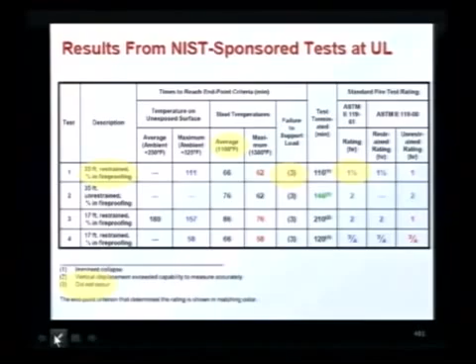What does NIST do with this experimental data? They throw it out and claim there's a 42-inch sag—10 times the value that resulted from the experiments. Do we have expert corroboration?

Here's Van Romero, an explosives expert: 'It's too methodical to be a chance result of airplanes colliding with the structure. After the airplanes hit the World Trade Center tower, there were some explosives, in my opinion, inside the buildings that caused the towers to collapse.'

Mike Taylor, a demolition expert: it looked like classic controlled demolition. The collapse of the Twin Towers mirrored the strategy used by demolition experts.

How about this structural engineer, Ron Brookman? 'Explosive clouds of dust and debris moving horizontally and vertically upward as the collapse of World Trade Center 1 and 2 are just beginning does not look anything like a heat-induced gravitational collapse mechanism.'

Why did complete collapse of the Twin Towers become inevitable? Why would all 110 stories drop straight down to the ground in 10 seconds, pulverizing the contents? None of the official reports address the issue of total collapse.

William Rice, structural engineer, also with Architects and Engineers for 9/11 Truth: 'The prevailing theory would have us believe that each of the Twin Towers inexplicably collapsed upon itself, crushing all 287 massive columns on each floor while maintaining a free fall speed, as if the 100,000 or more tons of supporting structural steel framework underneath didn't even exist.'

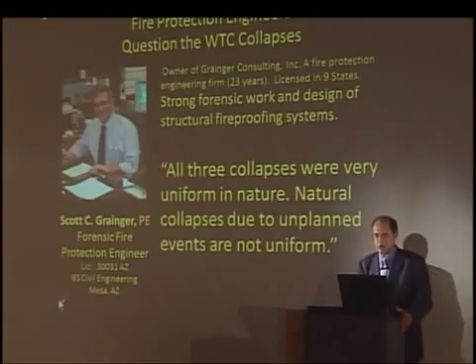How about Scott Grainger, with us today, fire protection engineer? 'The fires were very weak, oxygen-starved, as evidenced by the black smoke. Steel temperatures were low. All 3 World Trade Center collapses have no resemblance to any previous high-rise fire.'

How about Matthys Levy, who later joined the FEMA team? 'You've seen many of the managed demolitions where they implode a building and cause it essentially to fall vertically, because they cause all of the vertical columns to fail simultaneously. That's exactly what it looked like, and that's what happened.' That's what happened? What happened, Matthys, after you joined the FEMA team?

Did you look for controlled demolition with your initial hunch? No. Neither did this gentleman, Ronald Hamburger, who also joined FEMA after saying, 'It appeared to me that charges had been placed in the building.' He never looked for controlled demolition.

How about foreknowledge of these two buildings? FEMA was on site with their exercise Tripod 2. They had hundreds of people from FEMA, federal government, and the State Office of Emergency Management getting ready for a drill in downtown Manhattan for a biochemical attack. This is per New York Mayor Giuliani. Tom Kenney from FEMA says, 'We arrived late on Monday night, went right into action on Tuesday.'

Coincidence? Maybe. Mayor Rudolph Giuliani: I went down to the scene and we set up headquarters at 75 Barclay Street, which was right there with the police commissioner, the fire commissioner, the head of emergency management, and we were operating out of there when we were told that the World Trade Center was going to collapse. Who gave you that warning?

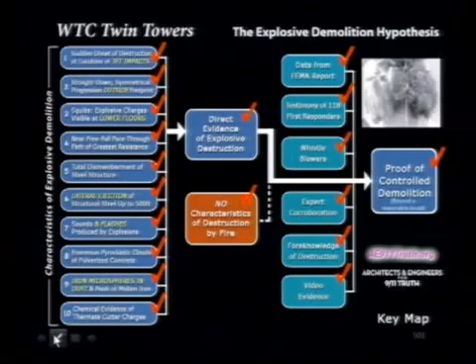We have plenty of video evidence you've seen, and this suggests all the features of a classic controlled demolition, with exceptions which are atypical of classic controlled demolition. None of these features can be accounted for by fire, let alone all ten of them. We have supporting evidence. This all goes to support the hypothesis of controlled demolition. It's proof beyond a reasonable doubt.

If you're with me so far, you have big problems. It's much easier, given our human nature, to go right into paralysis and take no action because the implications of this are absolutely staggering. We come up with these kinds of questions, which are valid.

Our government wouldn't do this to us. Well, we're not saying your government did this to you. Somebody was responsible for this, somebody somewhere on the inside. We don't know how high up it goes, we don't know how wide it is. I would have heard about it by now. You are hearing about it now. I didn't hear about it until two years ago.

It couldn't have been kept a secret that long. Well, the Manhattan Project had thousands of people, and it was kept quite a secret for a very long time.

I'm not an expert in controlled demolition. Well, wait a minute, neither am I. But you are the jury, and you have an obligation to make a decision. Guilty or not guilty is typically the decision; in this case, explosive controlled demolition or fire. You have to take this information, process it through your brain, and come up with a decision and then a course of action. I'm going to help you with the course of action. The decision's a little more difficult.

And don't do this, it's too horrible, I don't even want to think about it, I did not even see this stuff tonight — the worst form of denial. You avoid the debate, go back to sleep, and become a part of the problem. And it is a huge problem in America. America is asleep at the wheel. Very few of us know about this.